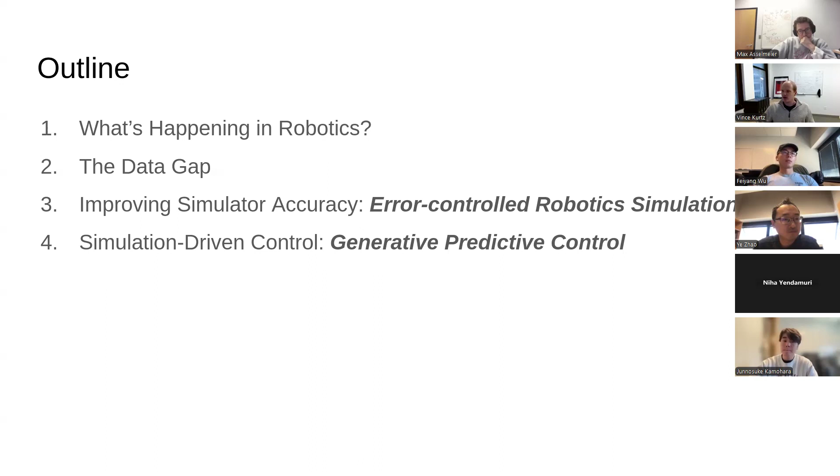You probably have your fingers on the pulse of what's happening big picture in robotics, but just to recap: our big headline is that generative AI for robotics is starting to work. We're not at the point of ChatGPT for robotics yet, but there are early signs that we're really getting there. The general procedure working for people is this: you collect demonstration data manually via teleoperation or motion capture or something, then you train a generative model - usually diffusion or flow matching. There are other architectures available, but you're training a model usually in a supervised way to imitate your manually collected demonstration data, and then you deploy the trained model on the robot.

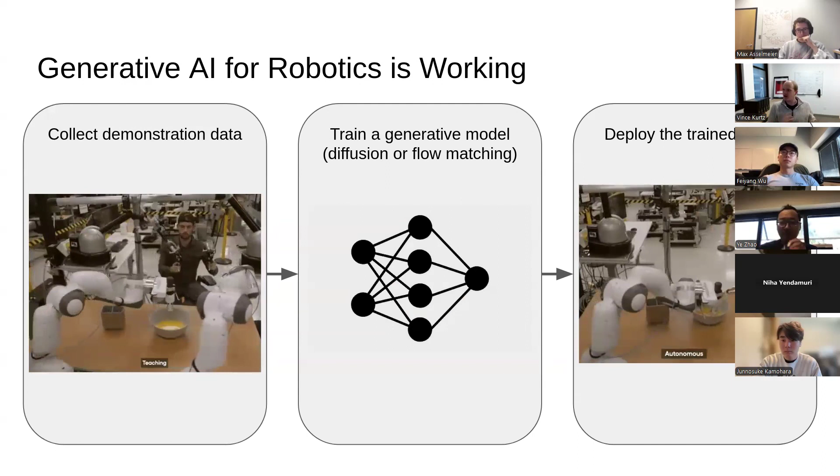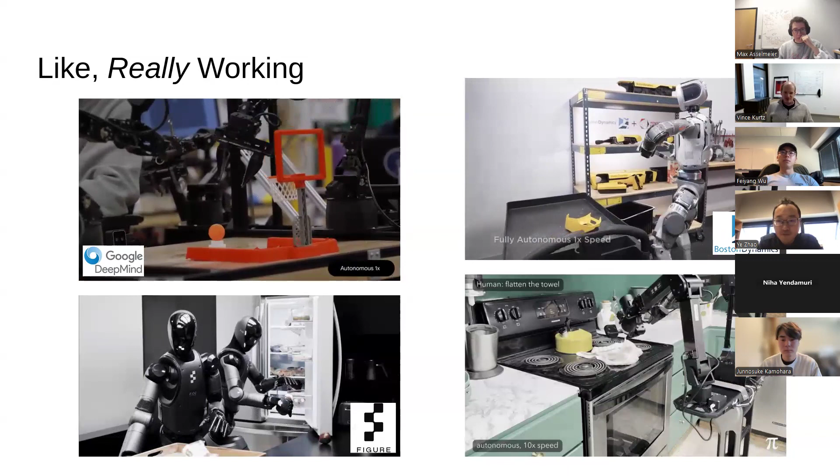Diffusion policy was one of the first things to come up with this. Now people have many variations on this sort of pattern, but this is really working, and it's working so well that it has sparked massive industry investment. Big companies - DeepMind, Figure, which is worth billions of dollars at this point, Boston Dynamics - these are just a few of the big companies who are investing. Venture capital is in on this now. This imitation learning is really hitting the big time here.

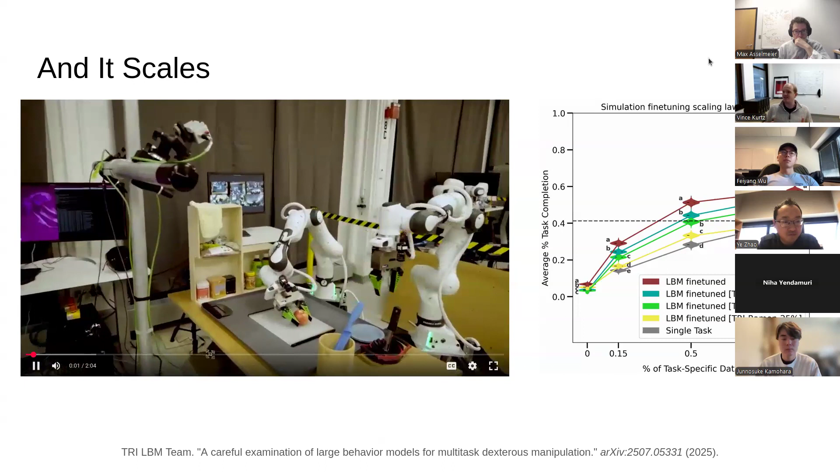And it scales in a principled way. One of the things TRI did over the last several years is dive into a very scientific study of this process, which they call large behavior models. The idea behind a large behavior model is instead of just training for a single task, you collect a bunch of training data for a bunch of different tasks and combine that all into one mega huge policy that you hope is going to be more effective than a single-task policy. And largely what we see is that is the case - the more data you add, so the brown curve here is all the data versus at the bottom, the gray curve is single task, and everything in between.

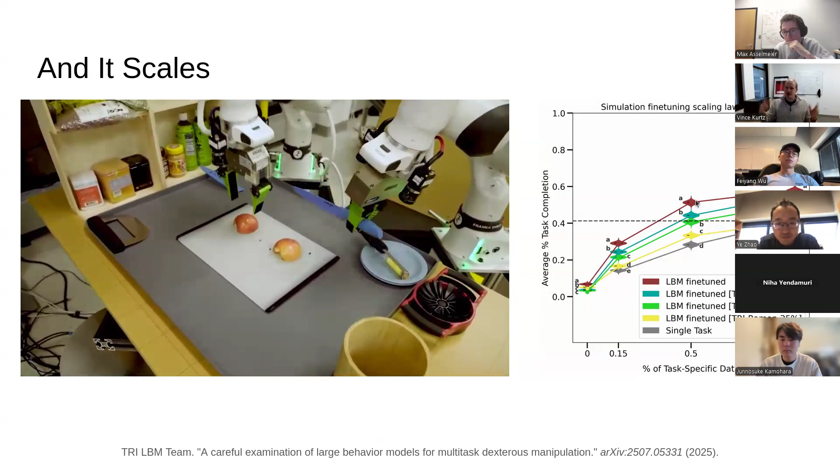The more data you add, the better it becomes. Now, that should feel kind of obvious, but we didn't know for sure whether that was going to be the case, or whether you'd get weird ups and downs as you add more training data. It seems pretty clear that these things do scale in a nice way.

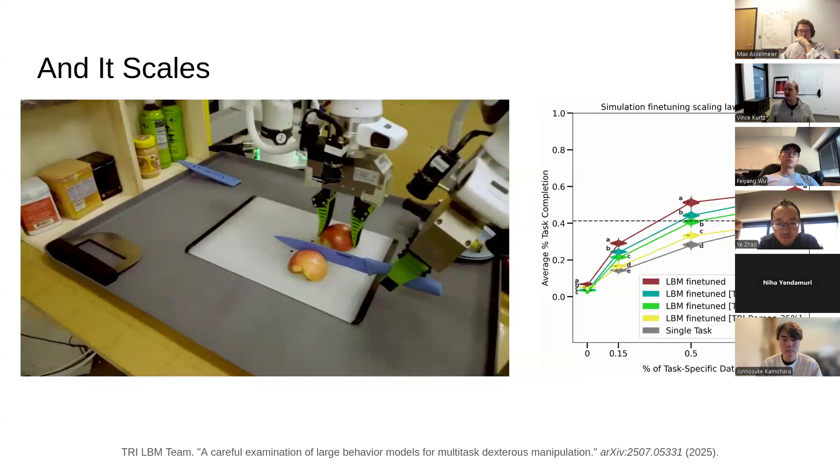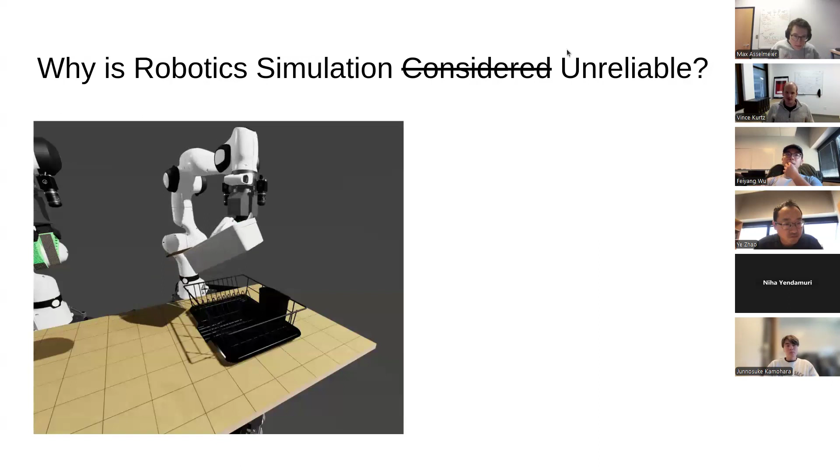So here's a scenario simulated in Drake, inspired by some of our LBM eval stuff, where a robot is dumping this mug and spatula on a dish rack, and you see the spatula stabs into the dish rack. These sort of thin objects, especially those wires on the dish rack, are really difficult to simulate.

And it can even get worse. Like we could try and drop the spatula on this thin-walled container, and then it stabs into the container and starts to get all sorts of wonky things. Obviously, this is not good predictive validity. We don't want to make scientific conclusions from this kind of simulation, and it just gets worse and worse.

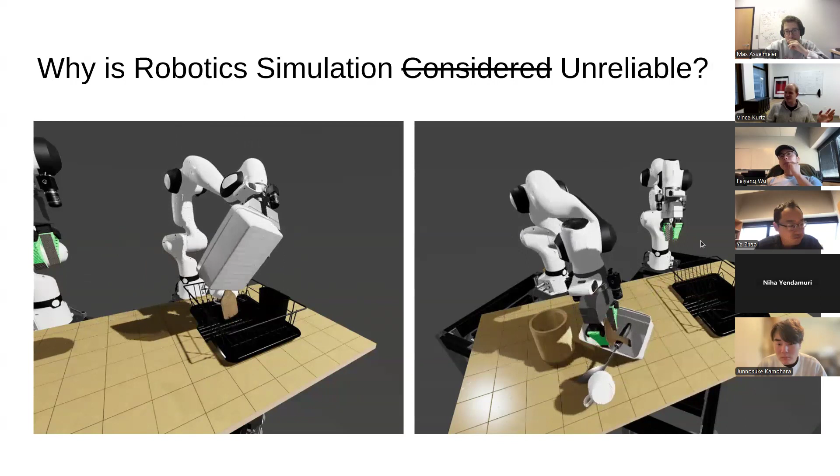The answer that I want to propose to this question of why robotic simulation is unreliable is that the techniques we're using for robotic simulation often descend from graphics and game physics. Game physics is really good. It's good at speed. It's good at throughput. You want your game to run smoothly. You want to run fast on as cheap of hardware as you can. It's not good at physical accuracy. And that's fine. That's what game engines are designed for.

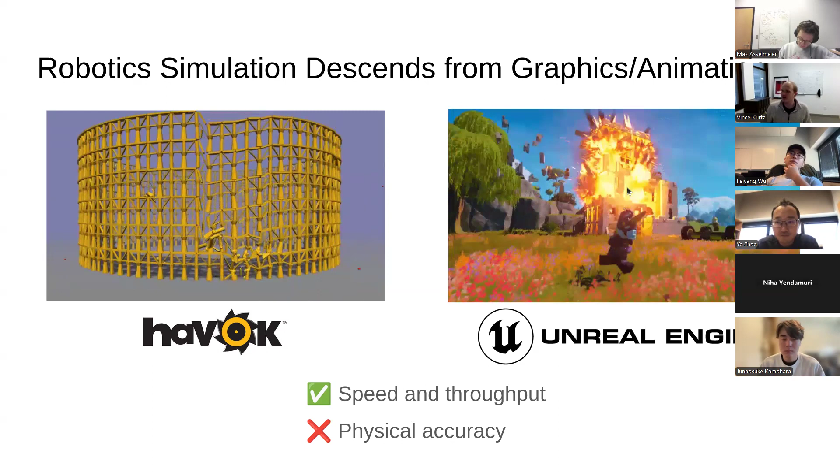When I'm playing this Lego game, I don't care that the barrel slides in an unrealistic way. I don't care that the inertial properties of each piece are perfectly correlated to the real world, or that the contact interactions between my feet and the character's feet and the ground are perfectly realistic. That's okay for games. But for robotic simulation, that's really not what we want. We care a lot about the contact forces and higher resolution sort of things. So robotics physics engines, simulators, have often in the past taken their inspiration from game development.

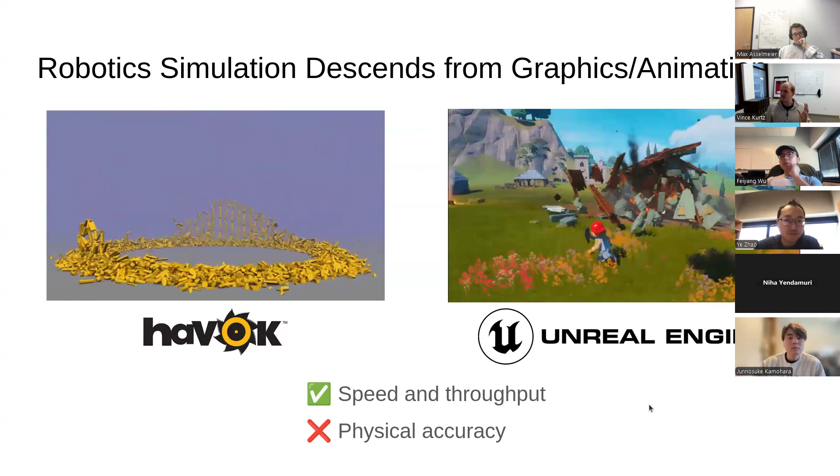There is another option, though. There is a whole other set of engineering grade simulation tools. They're used for circuit simulation, mechanical systems, fluid dynamics. These are often highly, highly tested pieces of software. They're usually commercial, used at big companies. And they're very focused on physical accuracy. They're really interested in verifying and validating their simulation model, so you can really get good error bounds on modeling error versus numerical error, and really understand when your simulation is going to be good and when it's not going to be good. On the other hand, these simulators are not fast.

If you want to try and simulate a robot using one of these more engineering grade tools, it's going to be very slow. And in robotics, we have a lot of demands on our simulation. We want to be able to run fast. We want to be able to run faster than real time. We want to be able to teleoperate. We want to be able to train an RL policy and run 1,000 of these in parallel, also much faster than real time. So our engineering grade tools are not quite what we want for robotics either.

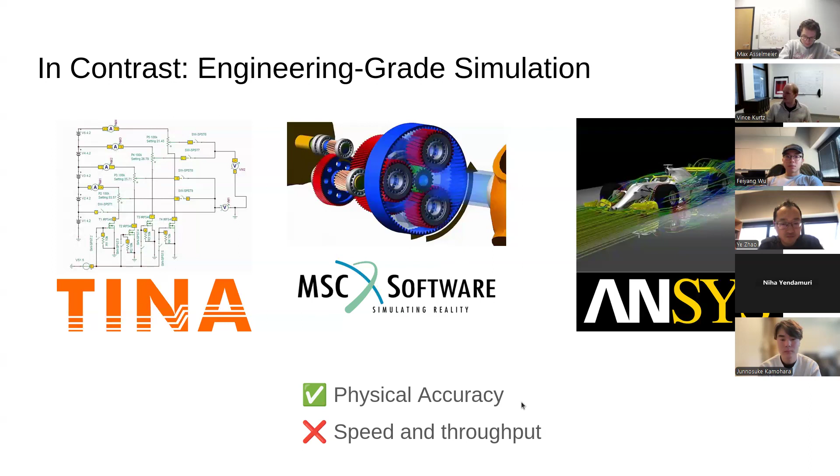So over the last year, I was working with the Drake team at TRI. Drake's big picture goal is to combine the best of these two worlds, using some engineering grade tools to get accuracy, as much as we need, while also meeting our real-time requirements of robotic simulation.

Drake is open source, you can try it out. At a high level, for geometric information, a big strength of Drake is the hydroelastic contact model. This is a middle ground between the point contact model you'd use in a game engine and a full finite element analysis like you'd use in engineering grade simulation. But it's really good for modeling complicated surface type interactions like you'd use for manipulation.

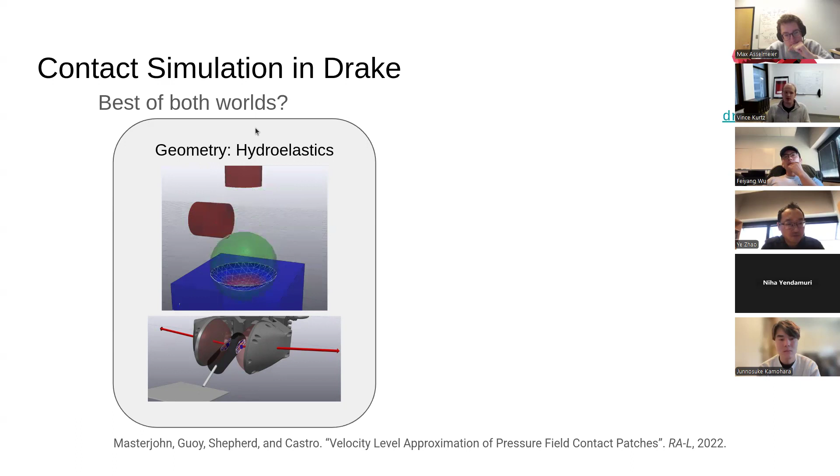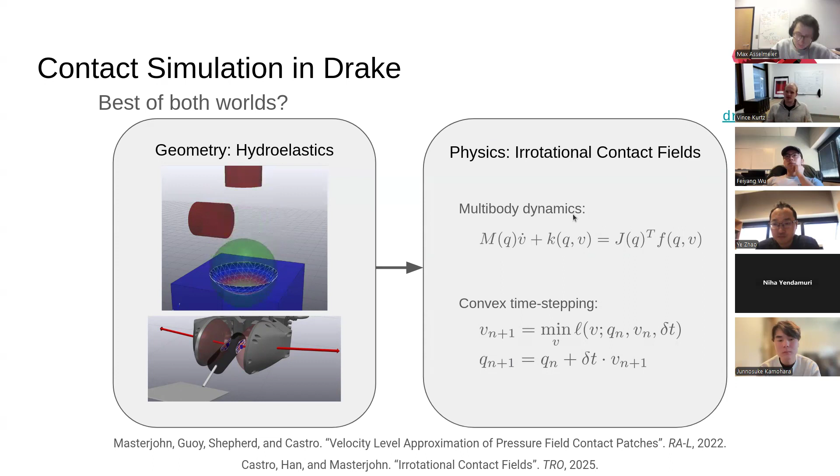For the physics itself, this is similar to other physics engines like MuJoCo, but with some slight differences. We formulate a convex optimization problem to solve for the state at the next time step. This convex optimization problem is based in the irrotational contact fields theory, which gives you some nice guarantees and properties. This is a convex problem, so it's always guaranteed to converge.

So contact and simulation in Drake - there's some good things and some bad things. The good thing is that the contact model is fairly realistic. It's not finite element, but it's a good deal better than point contact. Because the problem we're solving is convex, you're guaranteed to converge to very tight tolerances.

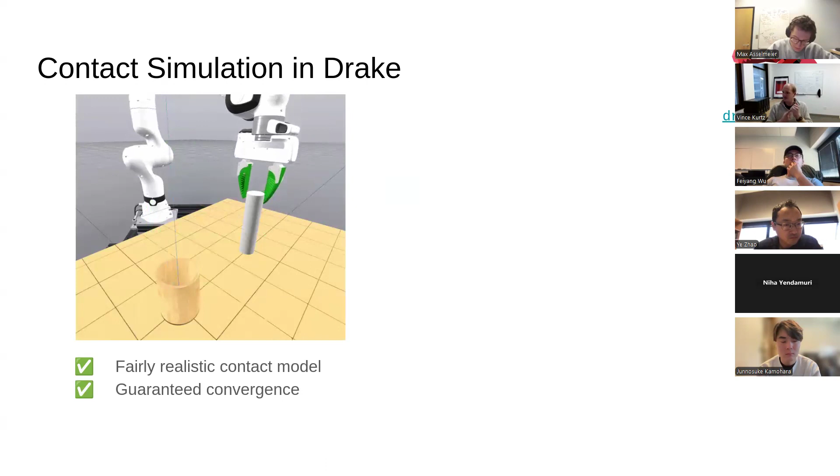Drake really is very strict about convergence tolerances. You never stop iterations early. If it doesn't converge to your specified precision, you get an error.

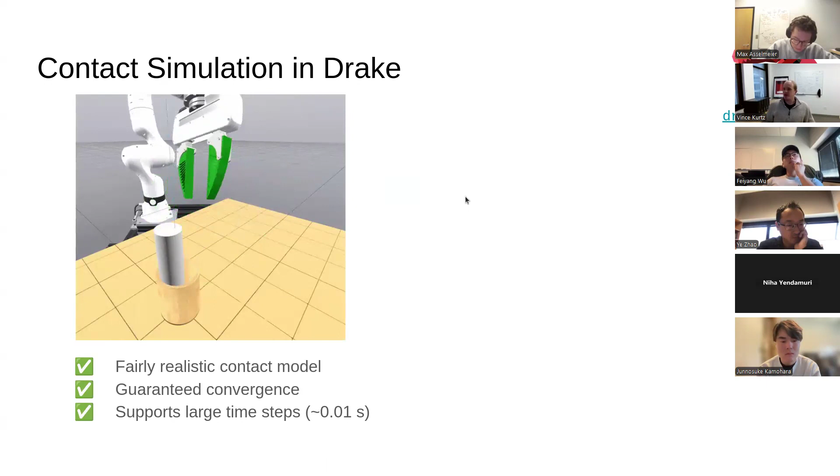It supports large time steps. That's a big benefit of convex solves - we can take these large steps. That means faster simulation overall. This is huge. It's consistent.

And that's an irrotational contact fields thing that's been added to Drake in the last couple years. Other simulation engines don't necessarily have this. So you solve a convex optimization problem, but you have some artifacts that don't disappear as the time step goes to zero. The convex formulation in Drake does have artifacts, but those artifacts vanish as the time step goes to zero.

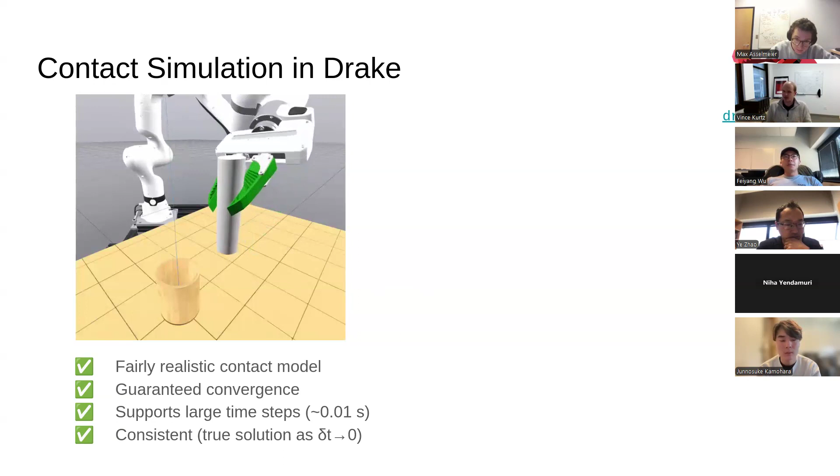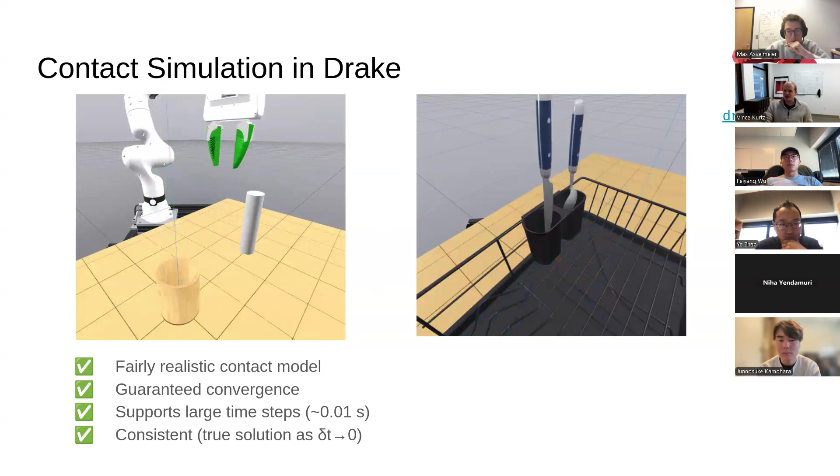It's still not perfect. It's a good solution, but not perfect. We saw some examples of bad simulations earlier - here's another, weird things are going on with these forks.

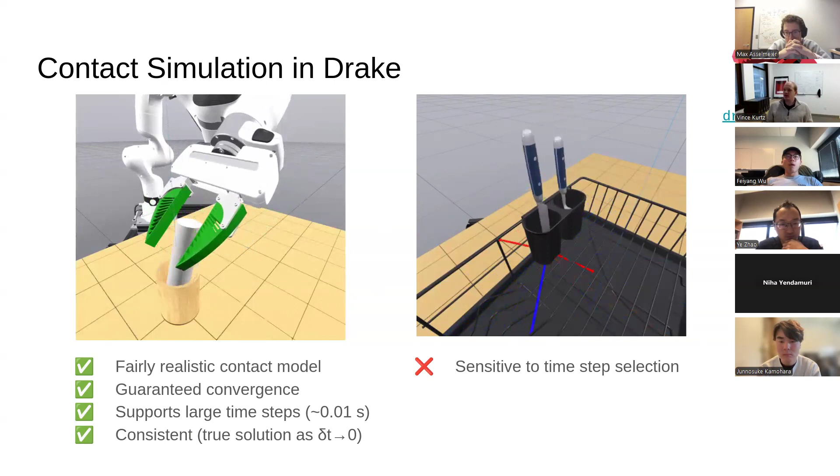The big one is sensitivity to time step selection. So when someone has a problem with a Drake model and it's doing some weird physics, the number one thing you say is, have you tried a smaller time step? And 95% of the time, that solves the problem.

Related, you have convexification artifacts, and those artifacts diminish as your time step gets smaller, but grow as your time step gets larger. And that can lead to all sorts of pass-through, like we saw before with the spatula, rattling like we see here, and so on - these sort of artifacts.

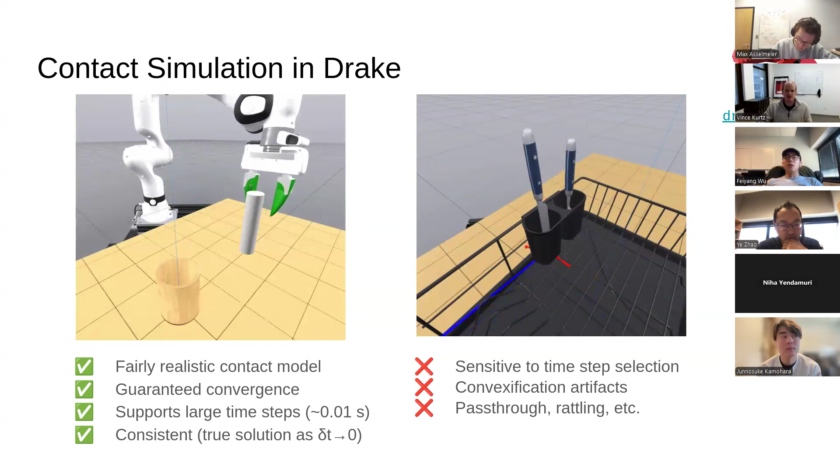What's a solution? Well, we can look to the engineering grade simulators for inspiration. Instead of discrete time, fixed step things like game engines and most robotic simulators do, our engineering grade simulators use error-controlled integration. So what is that?

When we do error-controlled integration, we start with our ODE representing the system dynamics, and we want to integrate this, numerically find a solution. So how do we do this? First, we propose a step, some time step delta t, and it's going to have some error with respect to the true solution, which we're showing in red. So we guess a step.

Then we come up with an error estimate - an estimate of the distance between the true solution and our first guess. Now, we're never going to get the true error, but we can approximate this by using a higher order estimate of the solution. And so the distance between the two gray points there is an estimate of the distance between our original guess and the red line. So we use the error estimate.

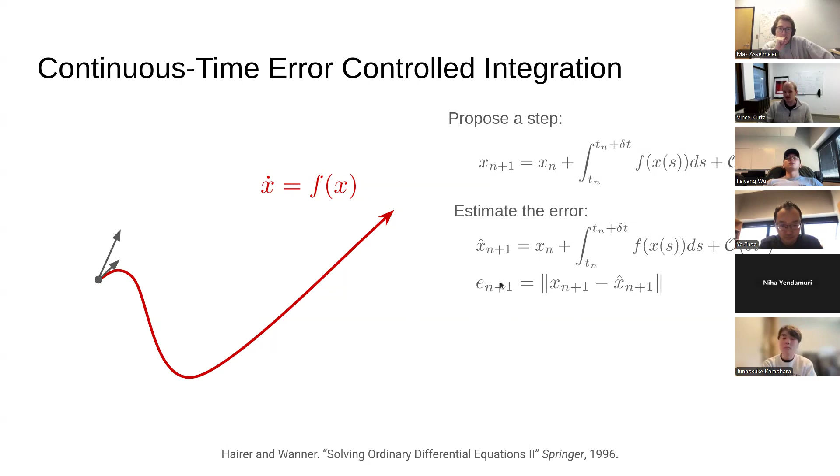This is our error estimate in some norm, and we use it to adjust our time step. So our standard rules - this is the basic idea, but with lots of heuristics - design the next time step so that we maintain a desired level of accuracy. This epsilon acc is a user-specified accuracy parameter, and you're trying to always keep the error below that accuracy. If you don't, you reject the step and try a smaller time step.

That's the error-controlled integration idea. And then you continue, you go on like this, and you have a rigorous bound on the one-step integration error.

Hey Vince, I have one question about that.

I'm just curious how that compares. I know that some of the Runge-Kutta solvers in MATLAB and stuff can do that sort of adaptive step size. Is it a similar thing where it's adapting due to its error? Exactly this. Okay, it's exactly that.

So if you do RK45 in MATLAB, it probably has an embedded error estimate. So that's your higher order thing, and it's doing this for you. Okay, yeah, cool, very good.

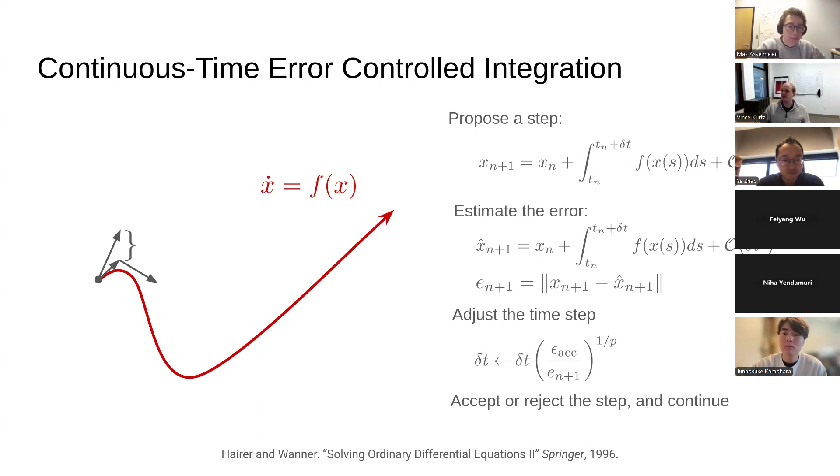Thanks. So yeah, pros of this thing. This is known technology, it's in MATLAB. It's pretty established, this error controlled integration stuff. You automatically get time step adjustment. You can get some error guarantees - not guarantees that you're matching the true solution exactly, but it's one step error, and it gives you some confidence that your solution is more accurate.

This is the big one. It allows you to decouple numerical errors from modeling errors. We always know that our robotics models are going to be wrong. We don't have truly rigid dynamics. Our contact models are going to be wrong. The inertia matrices that you write into your URDF are just approximations. There's always going to be modeling error. But when we think about simulation, we want to decouple that modeling error from numerical errors that are just due to the solver. And so error-controlled integration provides a way for us to bound our numerical errors. And then we can look at trajectory data or whatever and be confident that what we're looking at is modeling error and not numerical error.

Again, this is a proven technology. There are textbooks written on this. It's standard stuff. Problem is, when you go to use RK45 on a robotics problem with rigid contact, it totally chokes. It's really bad. The steps get really, really small. The simulation is painfully slow. It's basically unusable.

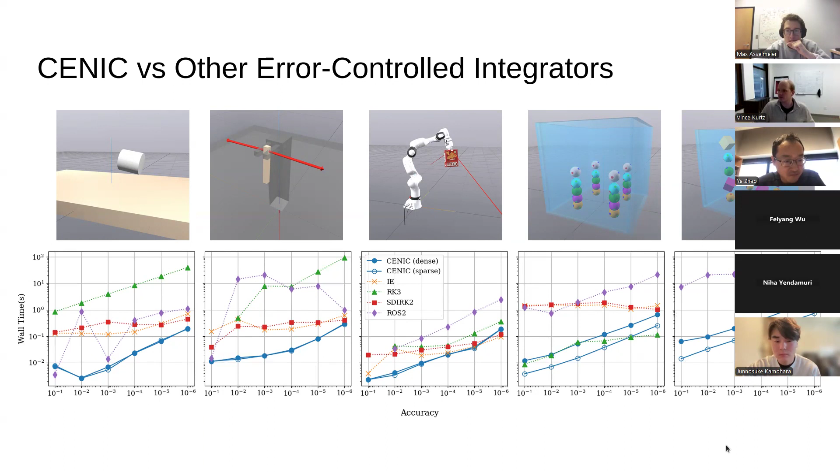We also compare with other robotic simulators. There are a lot of asterisks to this kind of comparison. The first asterisk is that this is only looking at wall time, and that's not necessarily the best thing to measure for simulation—things may be more or less accurate and have higher or lower wall times.

Obviously, as you tighten the accuracy, things get slower. We're at a very loose accuracy here so the simulation can run faster.

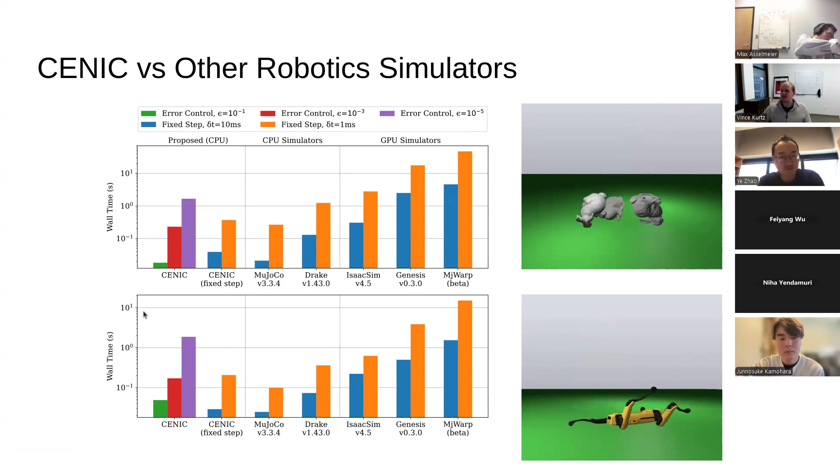There are also a lot of fun new things we can do with these capabilities. Just to establish some notation: when integrating an ODE, we can do this explicitly. This is like forward Euler, which is very easy to implement but is bad—we don't really want to do that for anything serious.

A better thing is to do this implicitly, so now you have x n plus 1 on both sides of the equation. You need to use Newton's method to solve this. It's a little more complicated, but has better stability properties.

Now, in our robotic simulation, we have our multi-body dynamics, and then other stuff—your controllers, planners, whatever. We do implicit integration; all robotics simulators do, for the multi-body dynamics part. But when you connect a stiff external controller, like a PD controller or inverse dynamics controller, most of the time, if you're writing it out yourself and not using the solver's special bindings, that gets integrated explicitly, so it's less stable. What we can do in CENIC is integrate this component implicitly as well.

I won't go into the details for the sake of time, but the end result is that we can crank up the gains on an inverse dynamics controller. The proportional and derivative gains are the same, and we can crank them up to ridiculous values. I don't know why you'd ever want 10 to the 7 as your derivative gain, don't ever do that, but if you wanted to, you could, and the simulation would still run, just very stiff and stable.

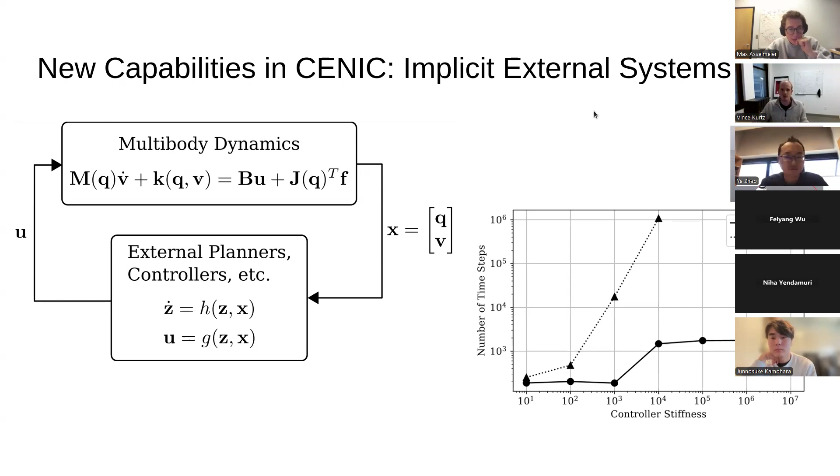We can also model static and dynamic friction in a more principled way using this error controlled approach. We basically interpolate between dynamic friction and static friction. This is a friction force as a function of tangential velocity.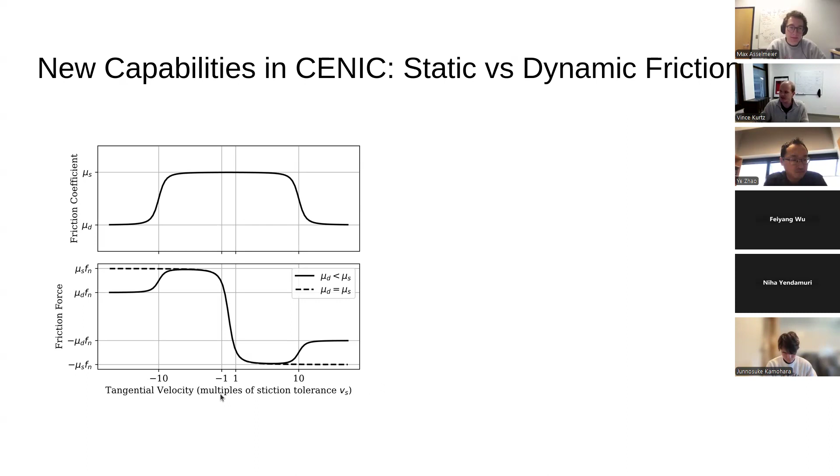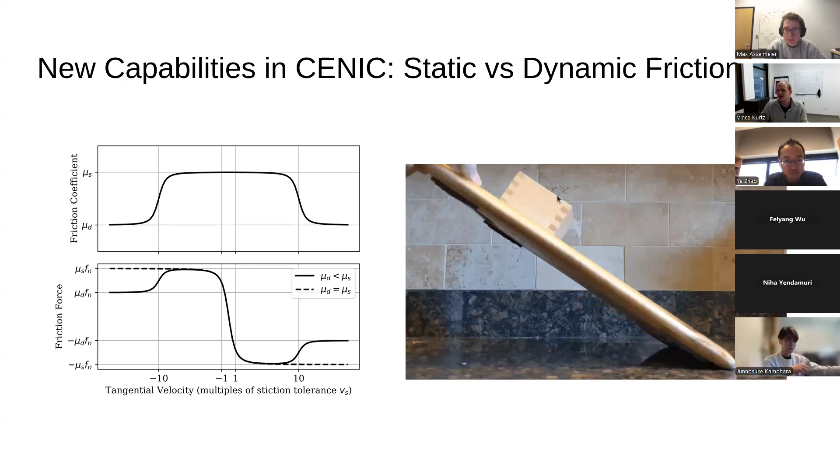Here's our toy experiment: a block, you slowly lift it, it's in stiction, static friction, and then when it starts to slide, it really slides fast because it gets out of that regime, now you're in dynamic friction mode. In old Drake, we couldn't match this well. We could match the slide angle, but with only one friction coefficient it slides slowly. Whereas if we use CENIC with two different friction coefficients, we can tune those to get a result that looks just like the real world.

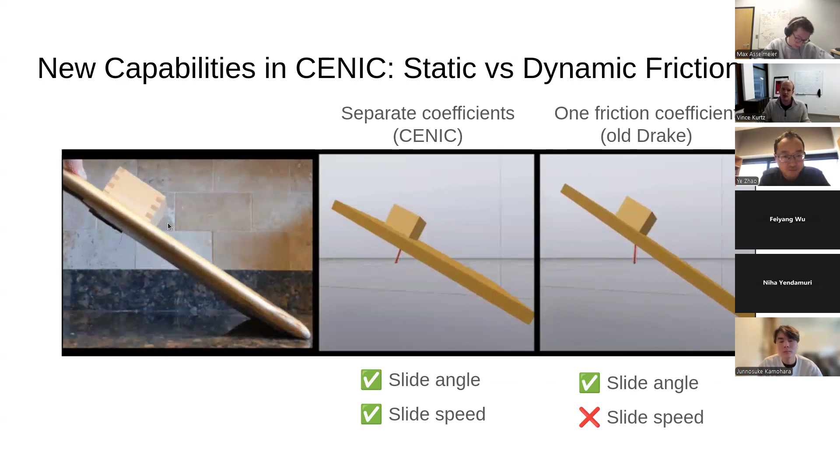We also did a more fun real-to-sim experiment, a dish rack example, where I pulled those horrible artifacts from before. We teleoperate the robot, drop all this junk into a bin, and then eventually play back the same thing in simulation.

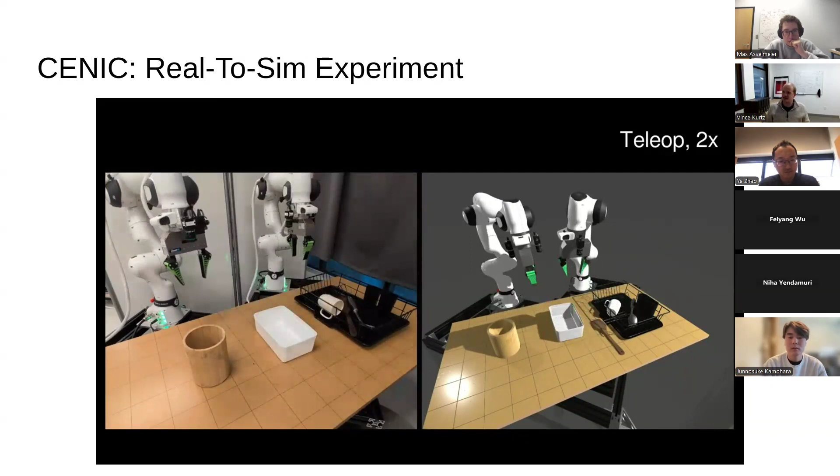And we don't get horrible artifacts thanks to error control adjusting the time step as you go. Obviously the trajectories are not exactly the same, and it would be unrealistic to expect them to be exactly the same. We have modeling errors, there's some chaotic dynamics going on in this simulation, but at least the spatula is not stabbing into the dish rack, and that's what we're happy with in this experiment.

Any questions on that before I move on to using simulation? Okay, so this is actually earlier.

One quick question, I think this is great. I know TRI put a lot of effort into the simulation team, and I guess most of the effort is to provide a high fidelity simulation so you can collect simulation data to train larger models. But on the other side, trajectory optimization used to be one of the big topics, maybe many years ago. I wonder if any of these new contact models and better numerical simulation tools have been integrated to solve trajectory optimization in a better way. Is there any effort along this line, or is it just separate?

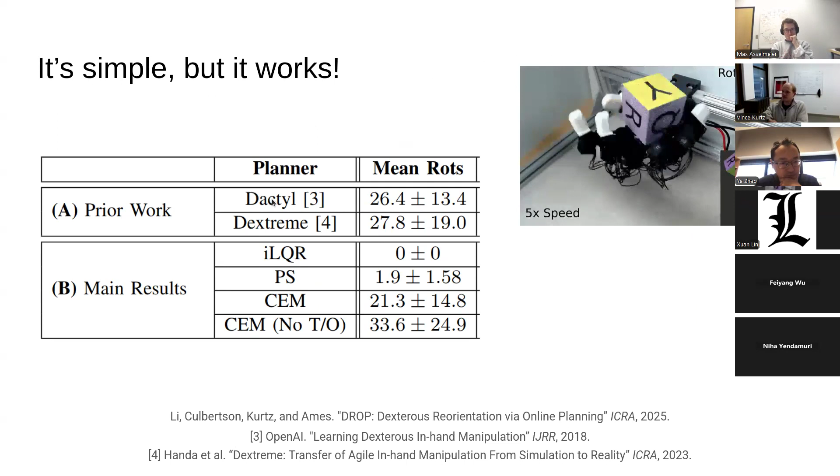We're able to get results that are competitive with old RL-based baselines that use a week of compute on a cluster, and we're doing just online MPC with really simple sampling. This is mean rotations before a drop. So it's still not perfect, but we're at least in the ballpark of these RL baselines with a really stupidly simple approach. And this was, to be honest, a little frustrating.

I spent so much time doing this gradient-based optimization, really thinking through the dynamics, like okay, how are we going to best get the sparsity pattern of the Hessian? And then it turns out that you just come along and sample, and it's just as good. So why does this work?

Basically, you can think of all of these updates as approximating this sort of ratio of expectations, which is itself a score, proportional to a score for a certain probability distribution. There's some things in the derivation I won't go over in too much detail now because we don't have time, but you see this sigma squared there. Originally that was kind of frustrating because we have a score, but it's also scaled by something. Well, it turns out this kind of scaling is a standard guideline in diffusion-based generative modeling. So that's kind of cool. It just falls right out of the math when you're deriving the score based on sampling-based MPC, and it corresponds really neatly with the standard heuristic-based guidance that people have come up with for diffusion models.

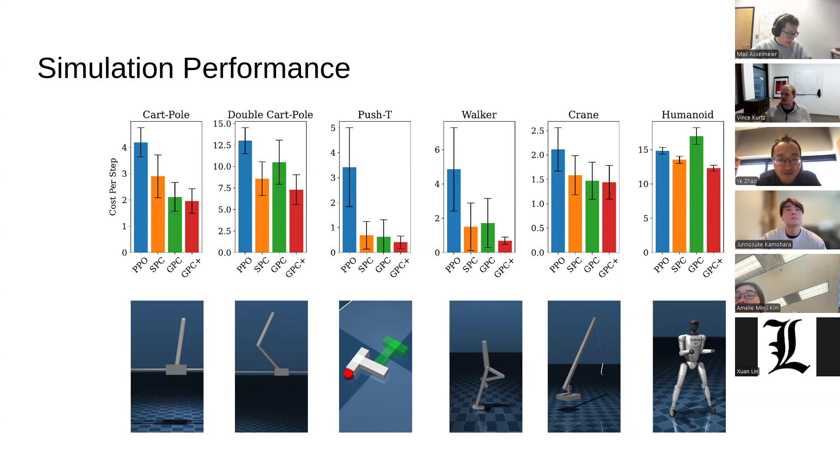The way the contact model enters here is through the simulation. When we do sampling-based MPC, all of those samples are forward simulations. In this case we use MuJoCo's contact model, but you could use a different simulator or your own fancier thing, and that would give you different rollouts because the contact model is different, leading to different results. So for sure that's an important consideration—the model, or in this case the simulation including the contact model, is important.

I see, so it's a completely different way to handle contact than traditional trajectory optimization, CITO stuff. This is kind of rolling out through the simulation, a sampling method, a really simple shooting-based method. So it kind of circumvents some of the bottlenecks of CITO traditionally, I guess.

For sure, yeah, this is why I think it's so cool and also frustrating. It allows you to do contact-implicit things—this is contact implicit—but you're sidestepping all the concerns of how to take gradients through contact, that sort of thing. You're just using samples.

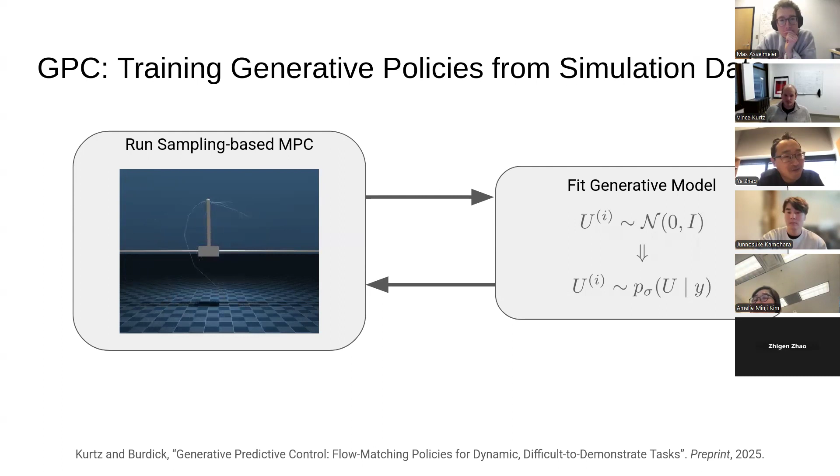There's still definitely a gap, I think 20%, going all the way to 100%. The data gap, I feel it's not just about the data size. Even if we have more data, I don't know how many more years it's going to take for us to get a robotics data size comparable to GPT amount of data, or maybe never. It's very challenging. But in addition to data size, I feel the data quality matters a lot. I don't believe we'll just train the models similar to how GPT language models did. I feel robotic data is fundamentally different.

So I think data quality is another dimension, and data type also matters. Right now a lot of data is limited to vision and proprioceptive sensing data, but there's a lot of force data still missing. I know TRI has been working using the soft bubble gripper, and there's a lot of tactile sensing effort there. I don't know how much diversifying the data types could help.